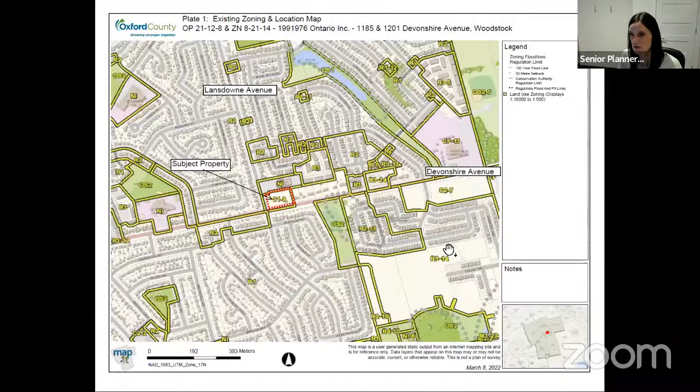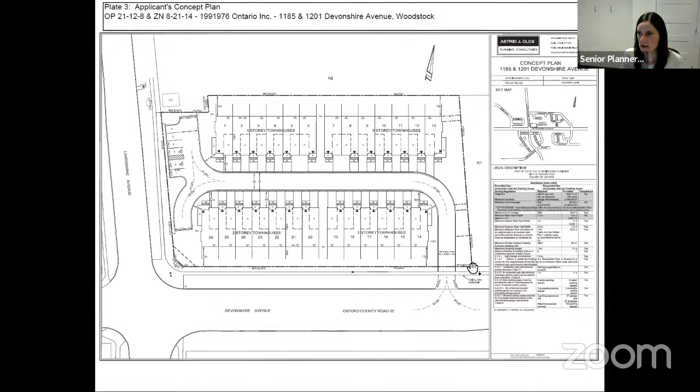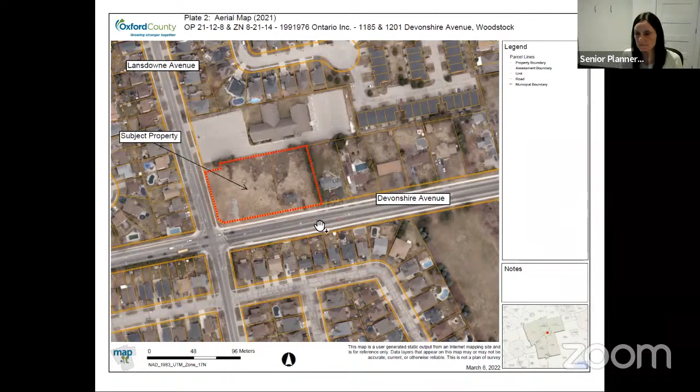Through the chair to Councillor Lauder's question, I'll share my screen here for a second, and I think the applicant can speak a little further when it's her turn. I should point out that landscaping would be addressed through the site plan approval process, and as I stated, the hedge would be maintained between the two properties. I can show you it appears there's about 5.8 meters between the access and the neighboring property, and it looks like she has a U-shaped driveway, so the driveways would be probably about 6 meters apart or so. Thank you.

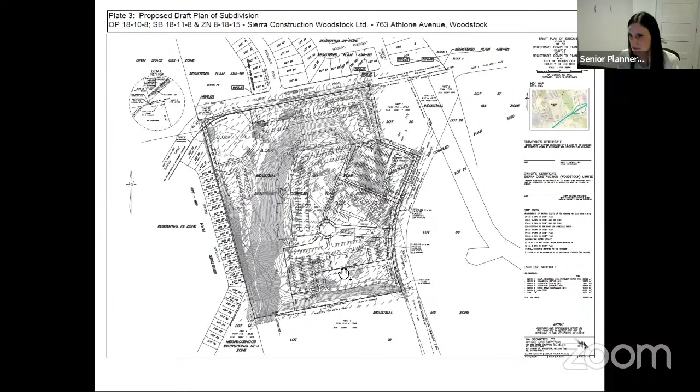This is a bit tricky to see, so I'm going to show a concept plan that's a bit easier to see. Within that draft plan of subdivision, the applicant has submitted to staff a concept plan showing a 4-story apartment building proposed along the westerly side, then again the park block, and 2 10-story apartment buildings proposed adjacent to Juliana. The concept plan says 10 stories, but there is some confusion about the interpretation of height, and based on the slope, the building will actually in fact be 12 stories.

So the report does analyze the 12 stories, and the applicant is requesting a 12-story height increase for these buildings. On the business park blocks, the applicant has already constructed one office building on this property. They received site plan approval and constructed it on the basis that these would be the lot lines.

This is the Hydro One call center, if people are familiar with that. They're also showing a 4-story hotel being proposed, as well as a 2-story medical office. That said, these lands are being zoned a special business park zone, so all business park uses will be permitted. So if the 4-story hotel doesn't go through, perhaps another business park type use would be established on the site, and same with the medical office.

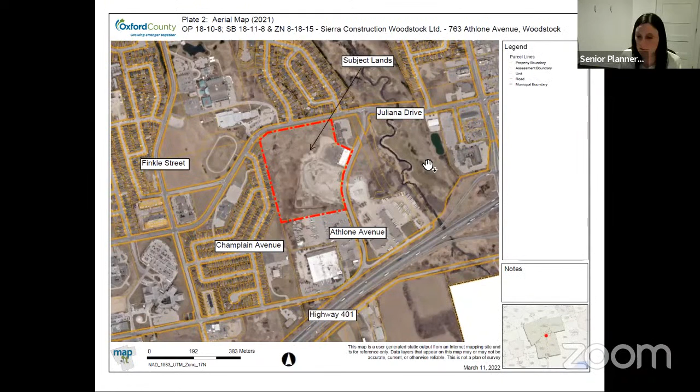The subject lands are located in an area populated by a whole mix of uses. As you can see, there's St. Mary's Catholic School, Fanshawe College, a sports complex, a church, traditional industrial type uses, and the former golf course. Following Juliana, you'll get to the Norwich Ave regional commercial node. There's also some lower density immediately to the west and to the north.

So there's a whole mix of uses, and based on that, we felt the level of compatibility for the proposal was good. This is similar to the last discussion we had with the last application, but the current zoning and designation allows for business park industrial type uses on the entire parcel. We believe from a compatibility standpoint it's a good transition from the traditional industrial type uses, which can generate louder noise, odors, vibrations, and whatnot.

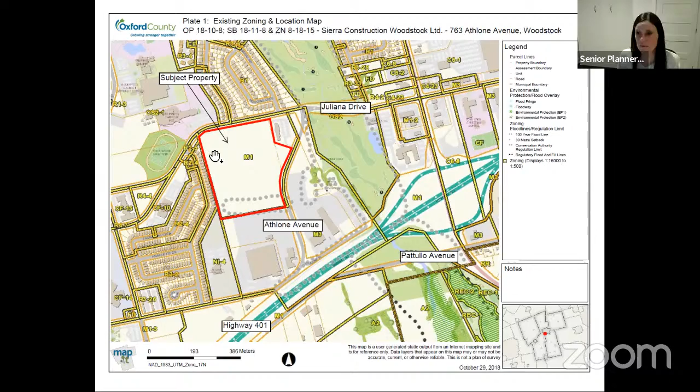So the business park blocks would act as a buffer to the residential, and these business park uses are being proposed more on the tablelands, whereas the slope is here. That's why the applicant is proposing the higher density development here, and towards the outskirts the lower, medium density. I actually have a sketch of that too.

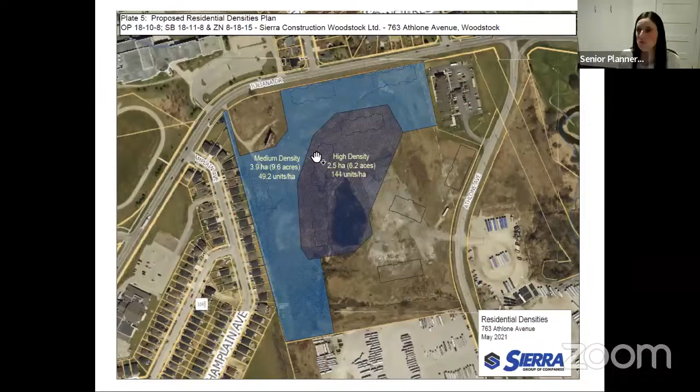And so we felt that was a good transition from the heavier industrial to the lower density. This area designated lower density, we do feel is compatible. We feel the slope will help with the imposition of higher and medium density development. And this building here is only being proposed at 4 stories, which doesn't pose as much of a compatibility issue with lower density residential uses.

There are a number of check marks we had to check off for this development, because we're taking lands out of employment uses and putting them into residential. We had to look at the Phase 1 comprehensive review, which council will be familiar with. We talked about it at the last meeting with respect to the Southeast Woodstock secondary plan.

Although the comprehensive review has shown there is a shortage of industrial lands, the city just undertook the official plan amendment and secondary plan to introduce new industrial lands into the city. In addition, as I noted earlier, these lands are not very conducive to industrial type uses, so we would recommend these lands come out of the vacant land inventory for industrial purposes.

It's noted in the report that the city is also in high need of residential land. The overall forecasted growth requires another 790 acres of residential land over the next 25 years, so we felt it would be appropriate to accommodate residential uses on these lands.

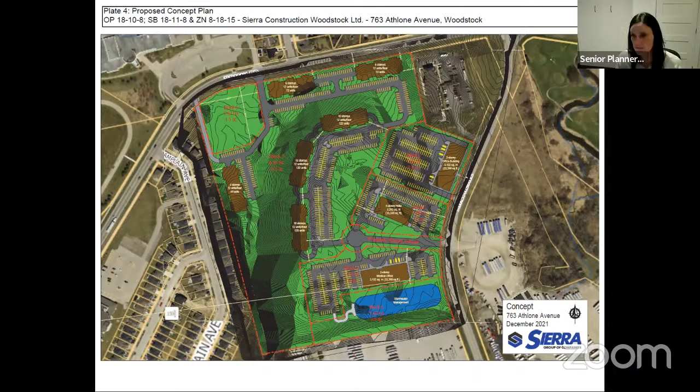So in light of that, we would recommend that these applications also be approved.

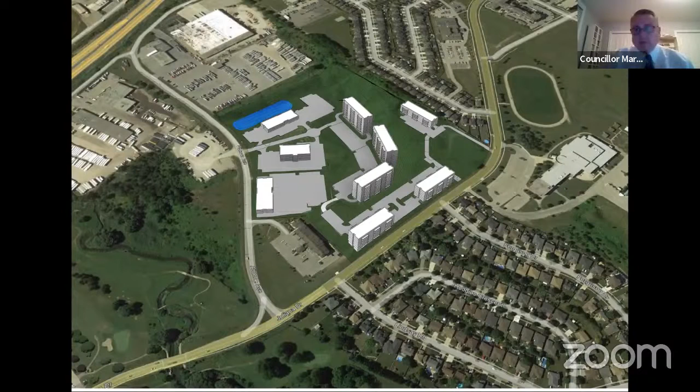Okay, thanks Mark. Can you hear me okay? Yeah, I just wanted to thank council for taking the time on this. We've been working on this concept since 2016, and I think it was 2018 we put our full submission into the Oxford County. So it's been on the books for a while.

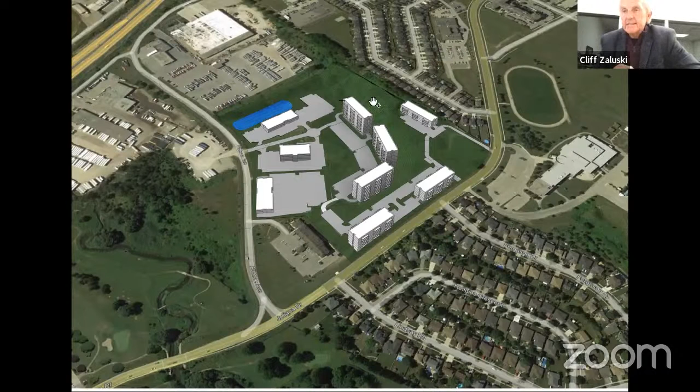One of our early meetings, I remember one of the county planners mentioned that this site was a hole in the donut, and it describes it pretty good, because within the city limits we have an old gravel pit with a lot of challenges on it, and it's not an easy site by any means to try to develop. So we've been working on it for quite a while.

As Andrew mentioned too, this was an old gravel pit since the mid 1900s. Definitely an eyesore. It was owned by Kenny Marshall back in the day, and I think he used to have a construction company all around Woodstock and the surrounding area. We took the license off in 2009, the aggregate extraction, and that's when we built the Best Western Hotel on one end. Now we're trying to develop the rest of it.

As Steve mentioned, it's a very challenging site. From the top of the slope to the bottom, we have about 60 feet of grade difference, and there's been a lot of fill dumped in over the years on this site. So we still have a lot of work to do with some more studies on our bank stabilization, hydrology studies, and record of site condition. We still have several studies to do.

One of the ideas of putting the taller buildings right at the base of the slope was to have two levels of parking garage under each building, to act as some bank stabilization on that slope, and that's why we have the two levels of parking garage there to help with that. Also with those buildings being at the toe of slope and that 60-foot embankment, they're not going to be overpowering to anything. They're going to kind of fit into that slope.

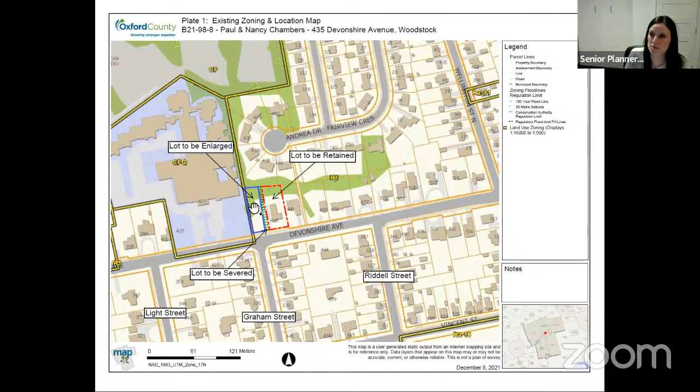And then following that lot addition being completed, another severance would take place, and the applicant is the DeRoo owner, who would be proposing two single detached dwellings on the subject lands.

The proposal for minor variance is to reduce the minimum lot frontage from 12 meters for an R1 lot to 11.3 meters to accommodate those single detached dwellings.

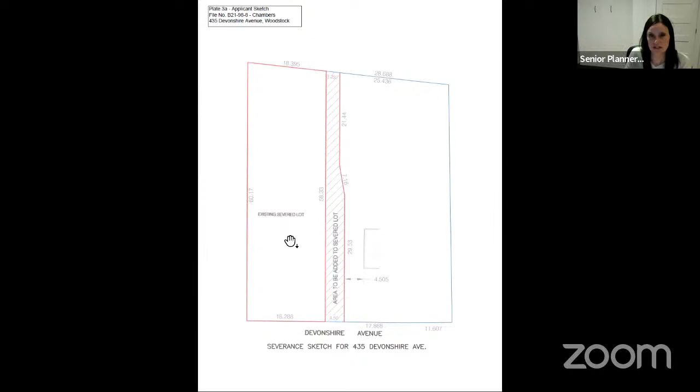I'll scroll down so you can see. The properties are quite deep, 60 meters in depth. So staff were supportive of reducing the minimum lot frontage from 12 meters to 11.3 meters, as there's still ample space on each of the lots with a 60-meter depth.

I'll scroll down a bit further. As you can see, once the lot addition has been completed and the proposal for the severance, B21-99-8, the applicant would also be proposing an easement down the center of the two lots, a reciprocating easement to allow access to each lot from Devonshire.

The applicant is proposing to build two single detached dwellings and then have two detached garages, sort of carriage house style, to resemble the character of the area. Those would be to the rear of each dwelling, which is why they're proposing the shared access.

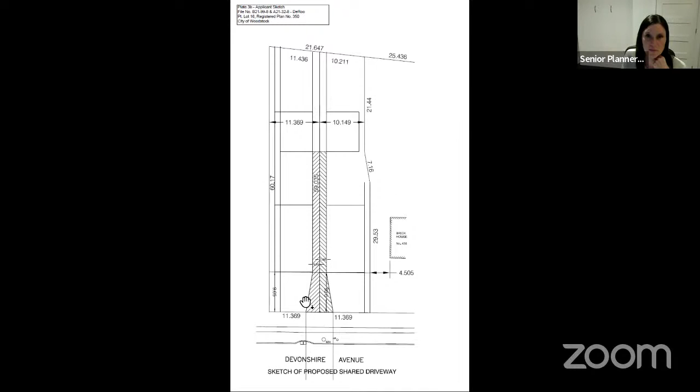In addition, Devonshire is quite a busy street, a county road. So the fact that they're proposing only a single access, as opposed to two accesses for each of the lots, is favorable as well to staff.

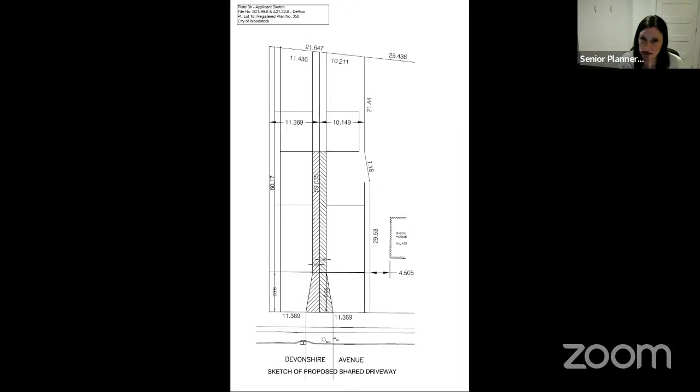Aside from the reduction in lot frontage, the lots are large enough to accommodate each dwelling and meet the relevant setbacks, ensure they're not exceeding lot coverage, and provide ample parking, landscaping, and outdoor amenity space. So we're satisfied with each of those lots based on those reasons.

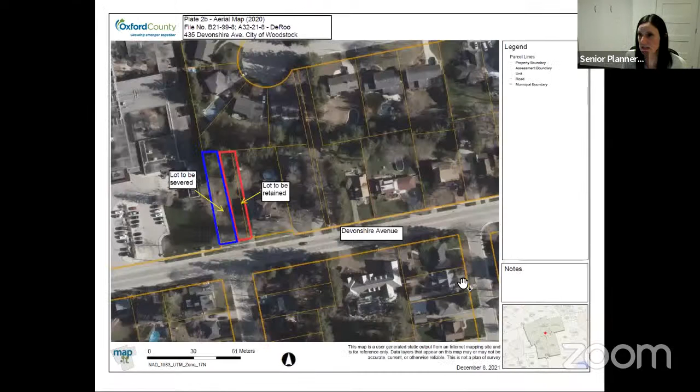There's access to municipal sanitary and water. We also feel that Devonshire in general has a real mix of lot sizes, so we're satisfied that these lots are maintaining the character of the area and will be able to construct dwellings consistent with other dwellings in the area.

So based on our review, we recommend approval of this application, and we've included a number of standard conditions that staff would like to see in advance of each of these lots being created.